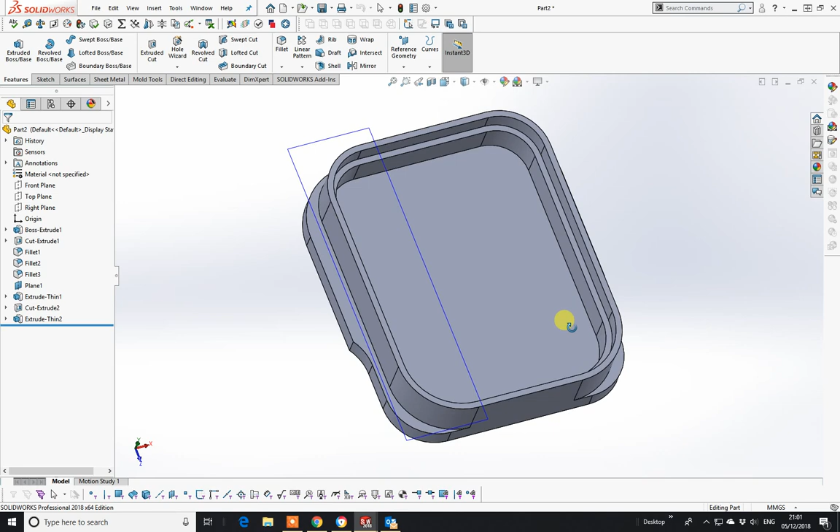If you look at your plug very carefully, you'll notice the bosses don't actually conform to the center line. So I press my space bar onto the line there, and I'm going to start another sketch. Again, I'm going to do it on that surface in the middle, the one we just created. So space bar, and I'm going to draw a center line from there down to that point there.

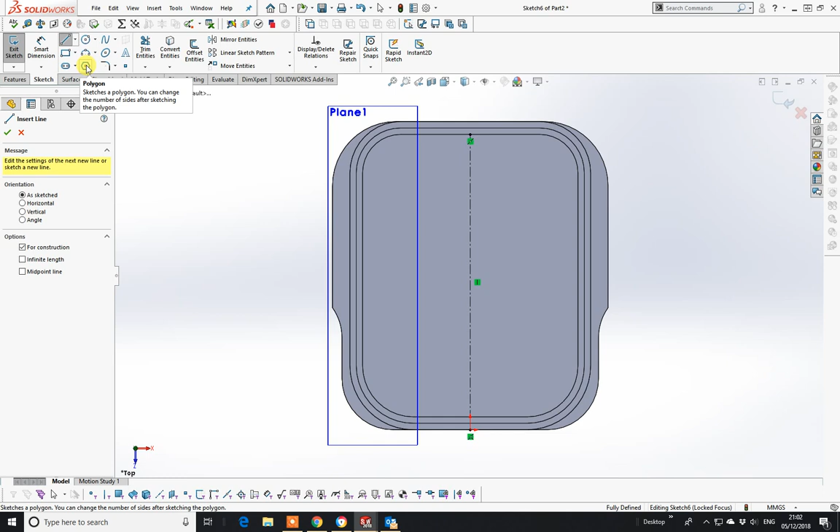Okay, so I've now got my main datum reference. If you measure, you've got to measure carefully, and there are various points that we will actually go from. So I'm going to put some more center lines in just to give me that reference. Now I know that if I go down here, just go with me on this, I'll do another center line down around about there. This is to put the top boss in. I know from my measurements I've taken them off a particular surface. This will come clear in a second.

So now go on to my dimensions, smart dimensions. I'm going to dimension from that line there, okay, to where I've just put the top of that center line in. And I know from using the verniers that distance should be 2.8.

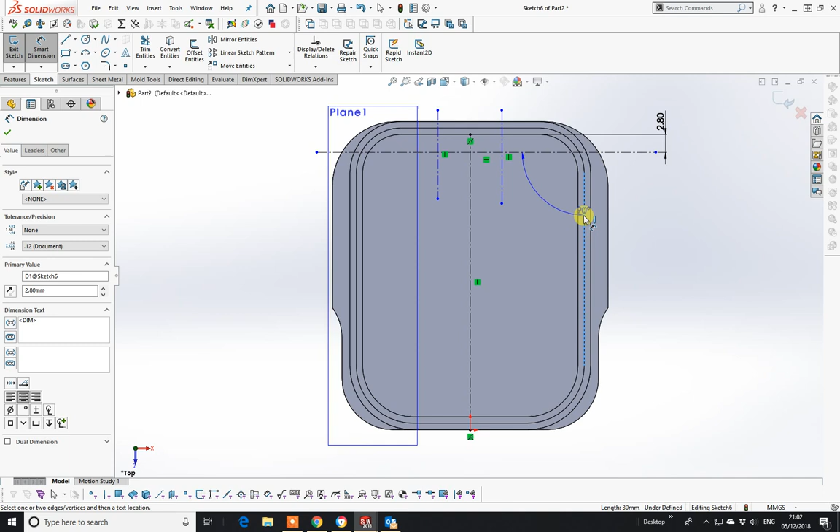Okay, so let's move that up. Now, the actual points, this is another way of doing a circle, this is what I'm showing you, is if I actually measure from that line there, okay, to that point there, should be a figure of about 13.5.

As I say, go with me on this. And again, from that line there, these are just random at the moment actually, so it may be difficult to understand. Just press that again to that point there. That there I know is 15. So that's how I know it's not actually the center line.

Now with circles, if you go up to the circle, pressing the little arrow coming down, you've got two ways of doing a circle. Plain circle from the center, or you can use what they call a perimeter circle. So that's what I've created, is the perimeter.

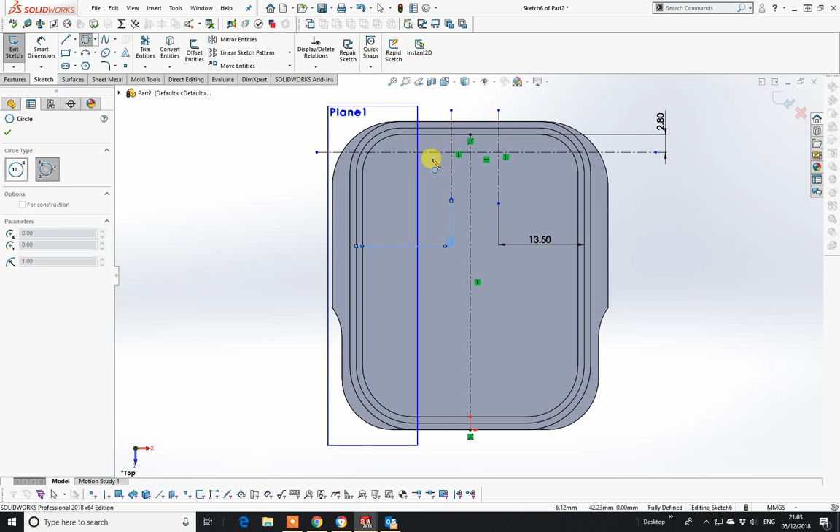So I know what these measurements are. So I'm going to go from there, click on there, and then just to close it off onto that line there. So I now know that is the correct diameter for that particular boss.

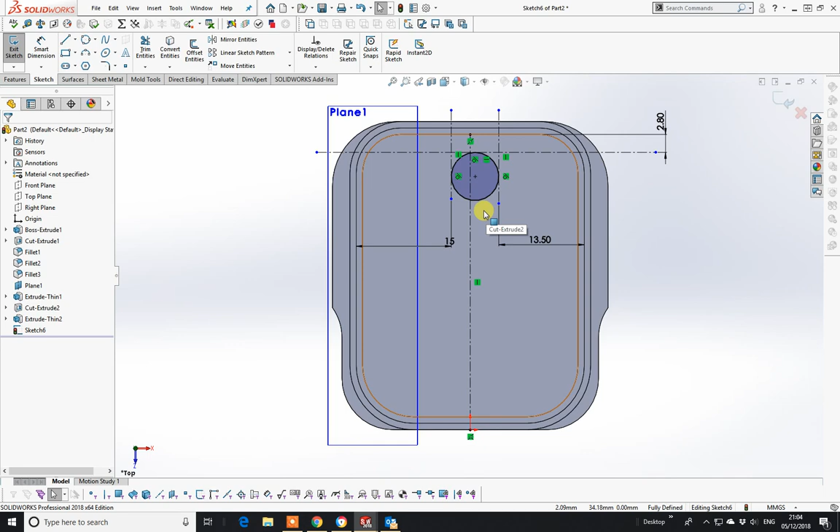So just select that, I'll leave that there for the moment. I could create the others, but I might do that in another sketch because they're all slightly different. So again, I know that is approximately 1 millimeter. So I'm going to go, and I know that's from the base because I measured the base.

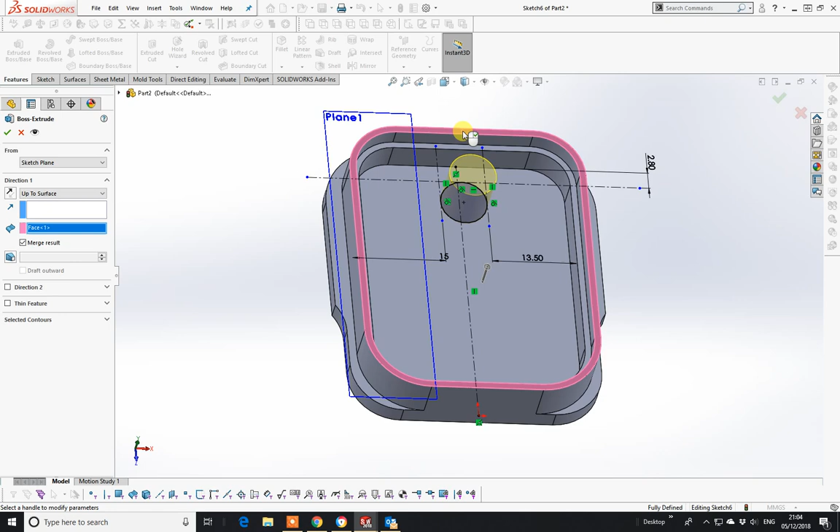So I'm going to go to features, extrude boss base, and you notice that's gone up, but I need to go to the top level. So if you remember rightly, I go with my blind, I go up to surface, and I know it comes parallel with that surface. Okay, but again I want to go to thin features.

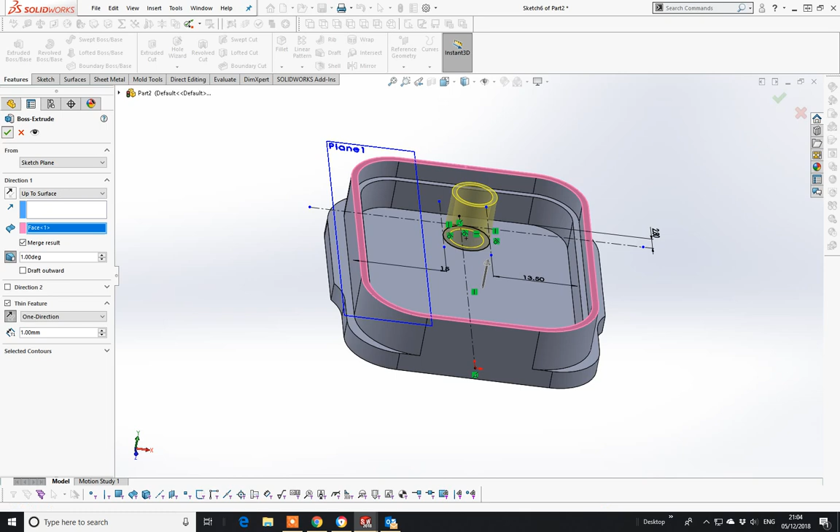Now if I go to thin features, I'm going to put a draft on here, actually 1 degree. So go to thin features, let's go to the outside. I want that on the inside. I'll show you in a second what I mean. Okay, make sure it's merge results. Okay, I now have just put my boss in there.

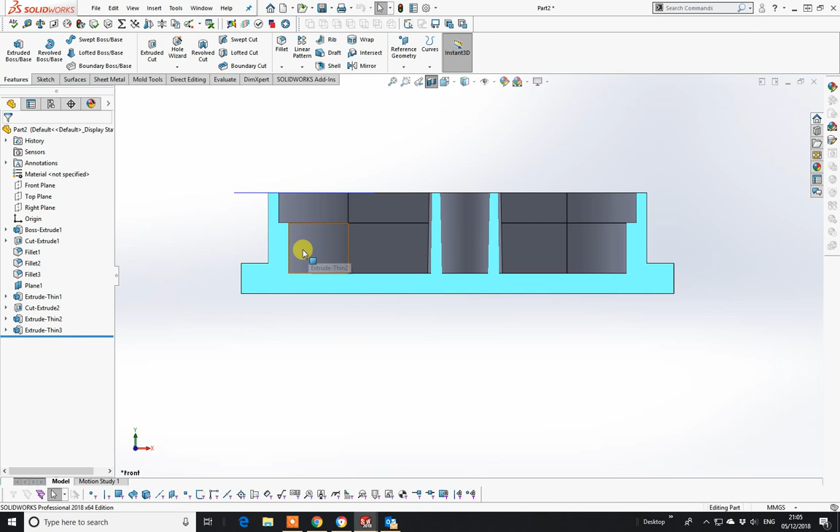I'm just going to go on there just to show you, because of the draft. I'll just press that there, spacebar. You'll see that tapers in and out. So when the mold tool comes in, it can actually be pulled out. It doesn't here at the moment, but we can actually look at that later on.

So I'm going to come out of the section view tool. I'm going to click on the top section there, which gives me that there. I'll turn it back around because I like to work from bottom to top.

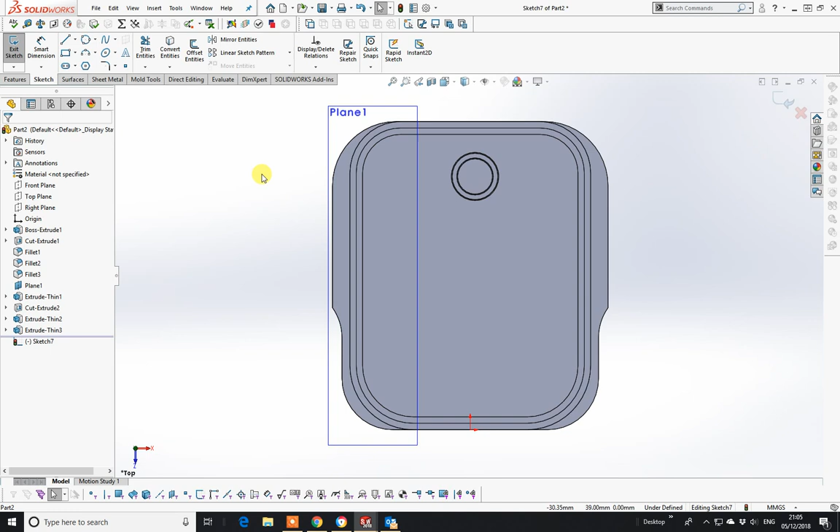Okay, and I'm going to put another center line in. So sketch, back on that surface. This is to do the other two bosses. I can do this all in the one sketch, but it's just to show you particular elements. So I'm going to go center line again. That's my datum point.

I can't see that there. There. Okay, I've gone black. So I know that's there. You can see how far off center that is.

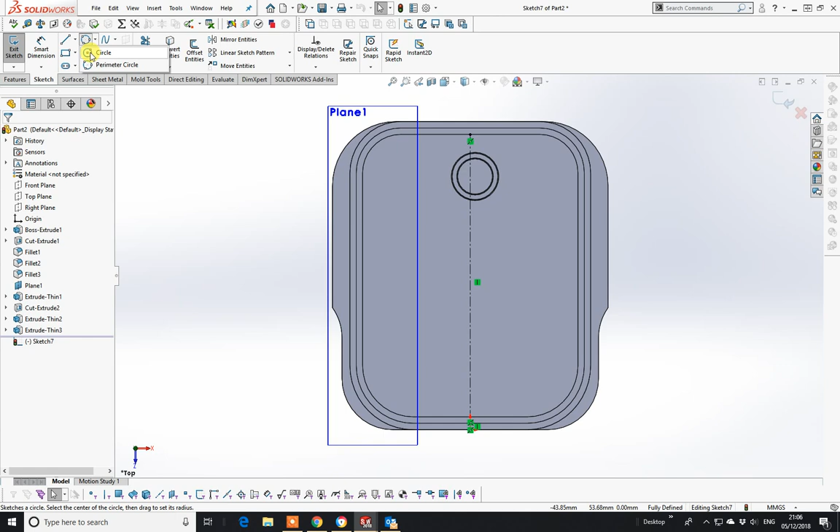Now if I draw another circle, I'll go back to my normal circle. I'm just going to put these random. There's one about there, and I know that diameter is actually 7 mils, so that's 3.5 radius. And the next one I'm going to put in about there, and I know that one is about 3.6. I have no idea why these are so different. If it was me, I'd try and make them all consistent, but there we go.

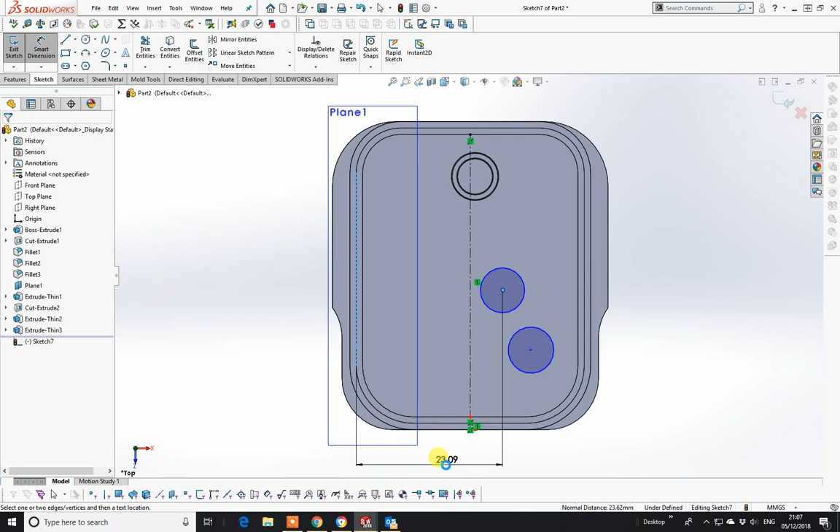So if you just bear with it, I can show you this. I'm going to now put in some more lines - I'll call them construction rather than centre. Actually, no, forget that, I don't need to, I can just measure off now. So go to Smart Dimensions. I'm going to pick on that inner line again from there to there, and I know from having measured it is 21 millimeters. And I know the other one is 29, so same point to there, that's going to go to 29.

Okay, they're still blue - I haven't given them a measurement for the diameter of the circumference, even though it says it in there. I've got to manually do that. But what I haven't got is a height up or down.

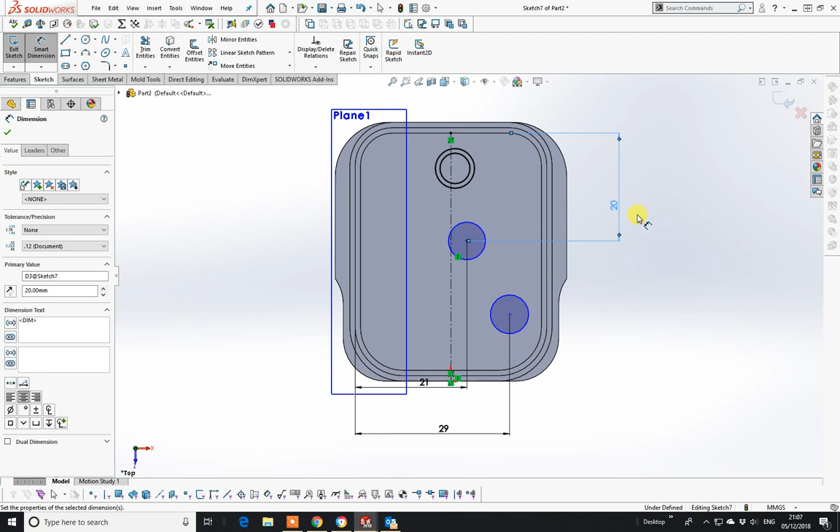So this time I'm actually going to use a datum up here. I'm going to go from that inner line - you can choose any line you want as long as it's consistent to do it, wherever you're measuring from. Now I know that is 20, that'll push up, still hasn't gone black, and the other one is 30. So go same point down to there, and that should be 30. And if I took a measurement there, I know that's 7, so it should go black now. And that one there is 7.2 - that's black as well. So I have the basis there for what I actually need to do.

But what I'm going to do is something slightly different, just to show you another way of actually doing it at boss. Actually, I can now just go to offset entities, because I know that this one here is the same as that one.

I'm just going to go to offset, offset by 1, and click on there. Okay, I want that internal, not external, so I just need to reverse that. Give that a green tick. And this next one is 2 millimeters. So go to offset again, I click on there, change that figure to 2, but it's internal, so again reverse it, and there I have got the sketches that I require.

Now I know in this one there's a little slip, but we'll go into that later on. So just go to Features menu, and then go to Extrude Boss Base.

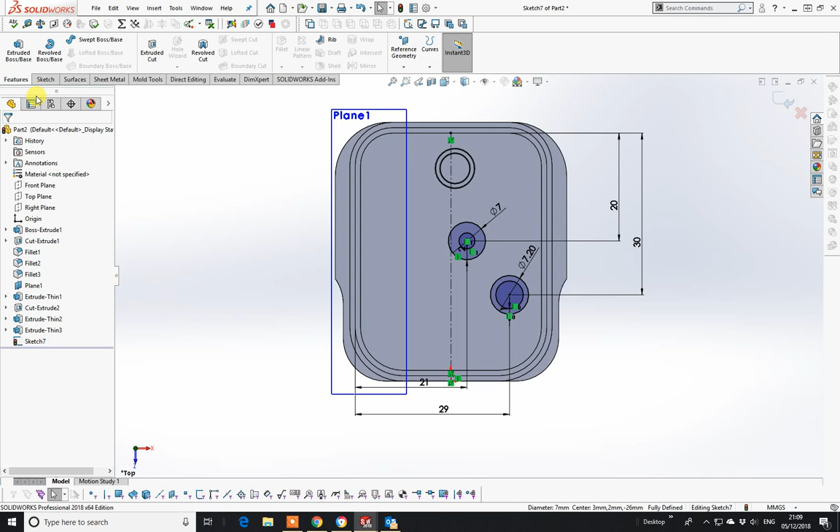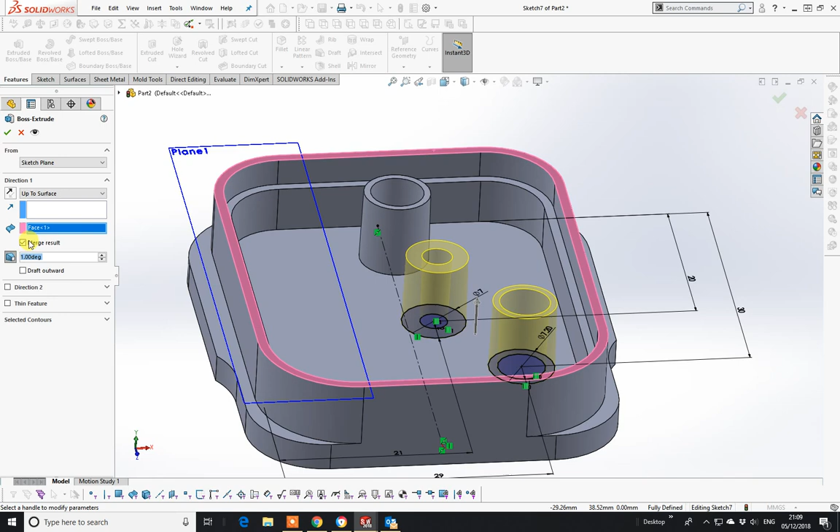Okay, and again I know they're the same height as that, so I can pick offset from - not offset from surface, up to surface. I can either pick that one, or I can pick the outside. Just pick the outside, so I know they're all the same. And I'll put a little bit of draft on, 1 degree, and there I have my bosses in place.

Now have a look inside those bosses - you will see a tiny little sprue at the top. Don't ask me why they're in there. It's about a millimetre high. If you get your verniers, the best way to do that is drop the end of the vernier to the point and to the top of it. I can show you this in a lesson, and then do it to the outside. So I think they're about 1 millimetre, maybe 1.5 millimetres wide.

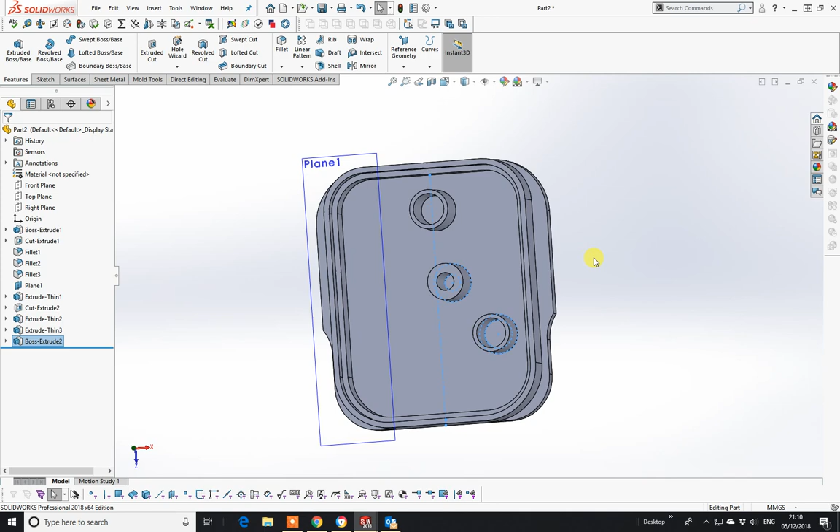So I'm just going to draw both of those in, doing it again in another sketch. Go to Sketch, click on that there, go to my circle. Now because I've got centres there, I can pick up on that centre and draw out. I'm going to do the same there because I know they're both identical. Now I can use my defining aspect - I can click on there and click on that one there, and then go to equal. So those circles are now equal.

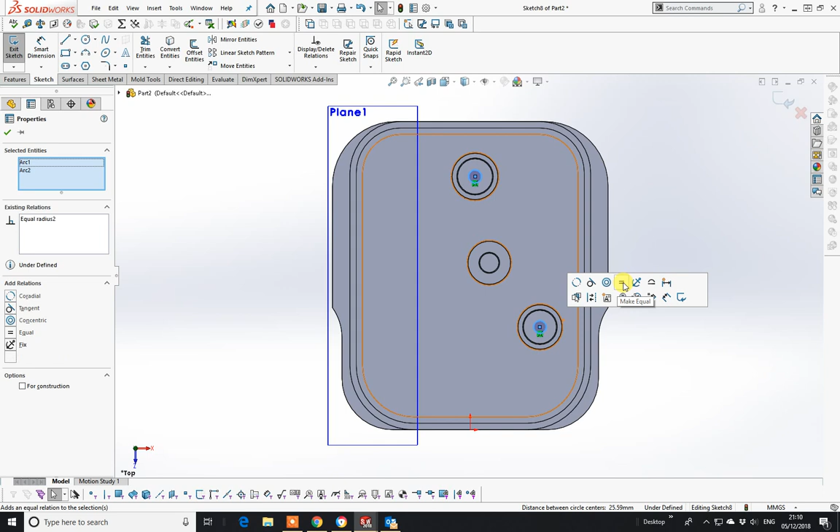If I put a smart dimension on one of them, let's do a diameter of 2 millimeters. Actually, no, change it - let's go 1.5 because I think they're slightly smaller. That's fine. Go to Features, go to Extrude Boss Base. This time I want to keep it on blind, but go a distance of 1.5 millimeters. Double check that, give that a green tick.

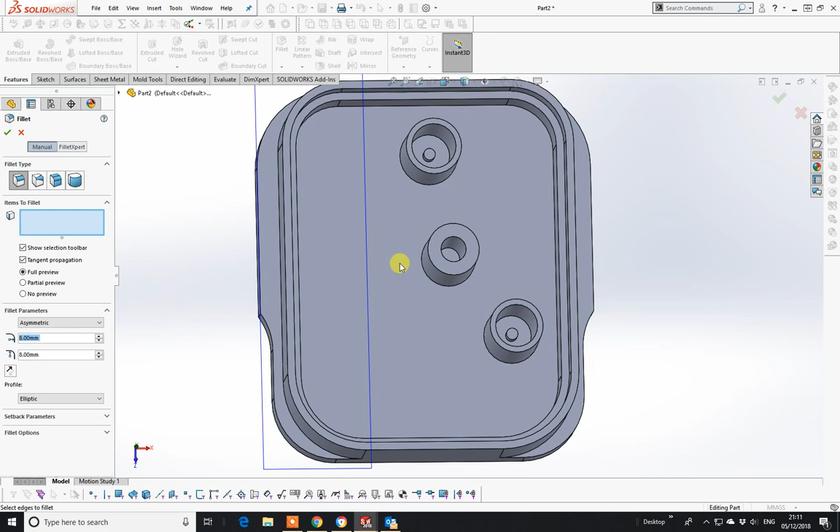Now if you look just slightly, you'll notice on yours they've got a rounded top. So just while I'm here, I'm going to go to fillet, and put a fillet of - what should we say - yeah, it's got to be 1.5. I need to change that back to symmetrical, change that to 0.75 because it's half. Click on there and come down on that one there.

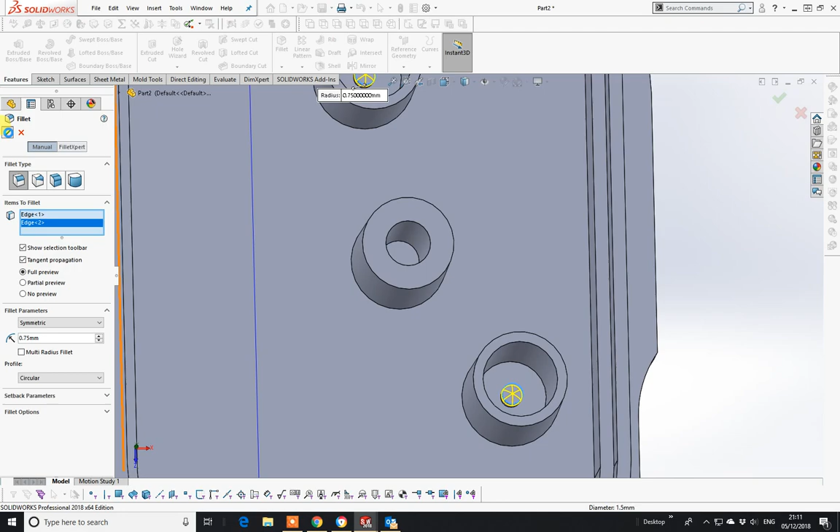Now I have actually forgotten there to put the draft in, but I think you'll probably get away with that. You can go back later and do that, as I say. So there we have our bosses in place.

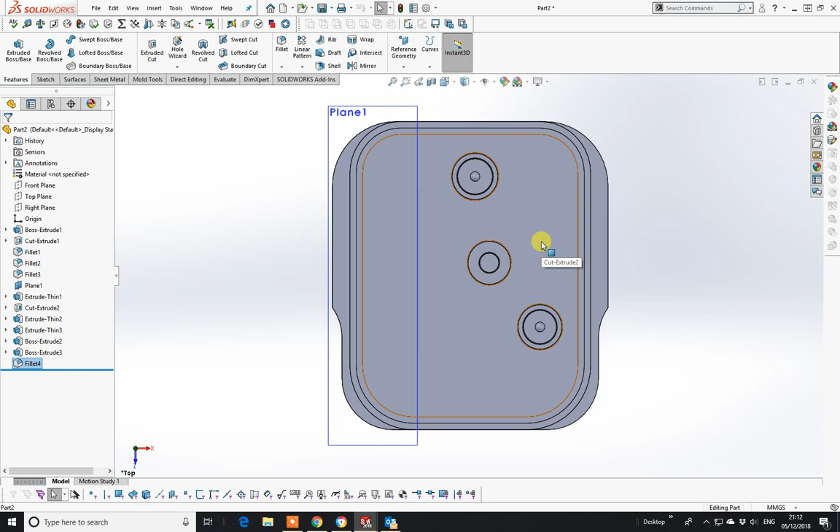Now there is actually a fourth boss which we will look at in a bit. So have a go there, because the next stage we're actually going to put the ribs in - the rib between those two there, that there. We'll do the cut out of this here, and then the rib that goes across to there. And then down here, these I think cap the fuse or separate the areas off. It is important you're accurate, and it will take you a little bit of time. But again, try and use thin feature - that will help you a great deal. And I will do that in the next video.